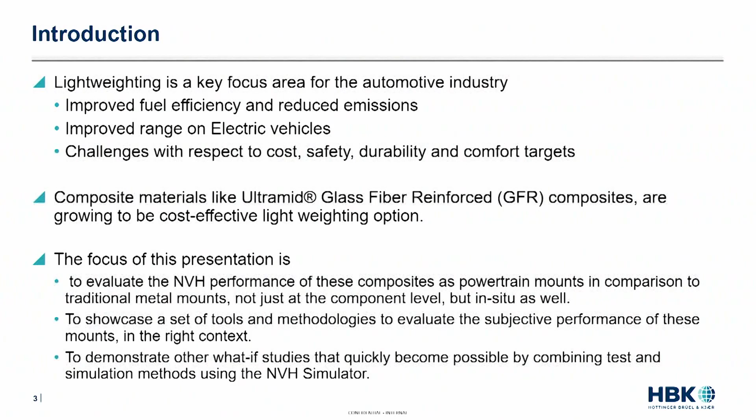Okay, so jumping into the technical approach here. For this study, what we did was based on a test-based approach, but I think a model like this opens up a lot of avenues for other kinds of data to come into play. But for this study, we focused on using a source path contribution or a transfer path analysis study.

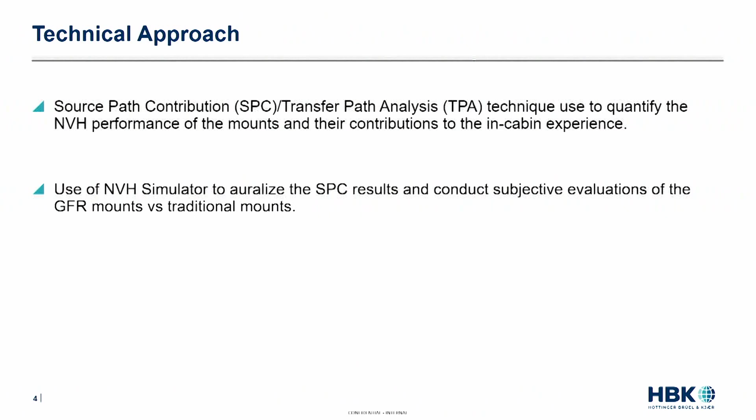So this is bread and butter, typical for NVH deep dive troubleshooting and target setting type of studies. So we use this to quantify the NVH performance of these mounts and understand their contributions in cabin. And then we took the results from this and put it into an NVH simulator for the subjective experience to be able to evaluate this back to back between the baseline mount and what the GFR mount sounds like, and then add the right context as well with that.

I think a couple of speakers who spoke before me did touch upon using a source path contribution approach or a TPA approach, so I'll try to be brief with it. The concept here is that you're trying to quantify or characterize all of the possible acoustic and vibration sources of your system or the system of interest. So if you're interested in powertrain noise and vibration, you want to characterize all of the possible acoustic and vibration sources and then sum all of them up together to say these are the different pieces that make up the total sound that you experience in the vehicle.

Now, in a test-based approach, you achieve this by putting a large number of transducers, both microphones and accelerometers, around your source of interest, and then you do operational studies, and you do static artificial excitation type studies, and then you combine the results. You feed all of this into an SPC model, and it will give you all of the pieces. It'll tell you what the partial contributions from each of these sources are as experienced at the receiver level.

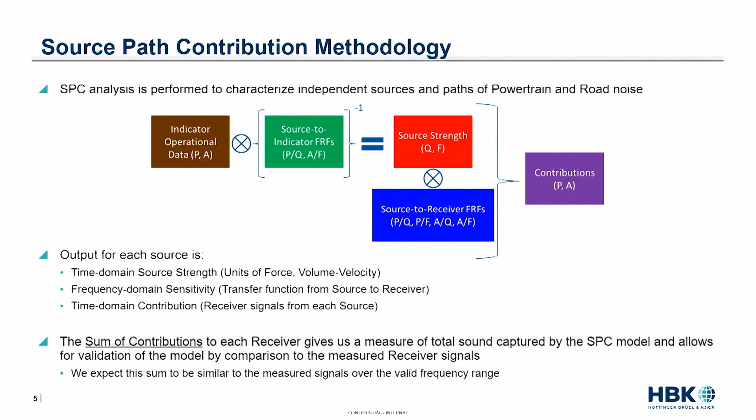So if you have quantified everything correctly, the sum of all of those contributions should add up and be the same as if you put a mic at the receiver ear and measured that. That's the goal, and that's the foundation of the model that we built here. So great. What comes out of this type of a model is, these are my top contributions. Is this an airborne or a structure-borne problem? Does this particular motor mount that I actually care about make it to the top of the list? You're starting to answer a lot of questions, which in the context of the vehicle are very important. You're no longer just isolated to just one component, but you're starting to understand how it matters in the greater scheme of things.

And so you take a model like that, and when you migrate it over into an NVH simulator model, you have now opened up many more doors and opportunities to do a lot of other things. You can take one subsystem and have a very detailed SPC model, but now I want context. I want to see how road noise and all the other sounds of a vehicle come together. Then this is a great way to do that. You can have different TPA models, and you can pull all of them together into the simulator.

Again, I feel like every bullet point I have on here was something that one of the other speakers gave as an example or an actual thing they've incorporated in their study or in their workflow today. So you start to combine all of these things, and then you have a model that is virtual, but it's drivable. It's pretty much comparable to hopping in a vehicle and driving, but now you have so many more possibilities at your disposal. So jury studies, target setting, target cascading, evaluating design changes, all of this becomes possible.

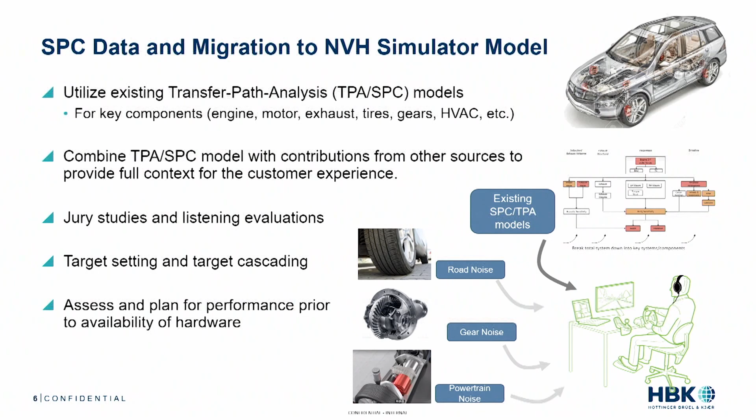So for this study, again, it was a test-based approach, so there are certain things we took into consideration for the SPC study. This was a powertrain-only study, and all of our transducers that were used to characterize our sources were placed on the subframe or body side. This is a pretty standard practice. This helps make the test approach a little bit easier. You don't have to deal with any kind of rubber isolation that you have if you were to place transducers on the active side. And so it's easy to then go do your static test with an impact hammer, which is a reasonably easy approach.

And then the other piece to it is for the SPC process, we use a matrix inversion approach, which is again a pretty common approach. And here there are certain rules of thumb to remember.

In order for the maths to work out, you need to have the right number of redundant transducers that will help identify or quantify your sources and the associated source strengths. So our typical rule of thumb is you want over, or at least 2 indicators per source.

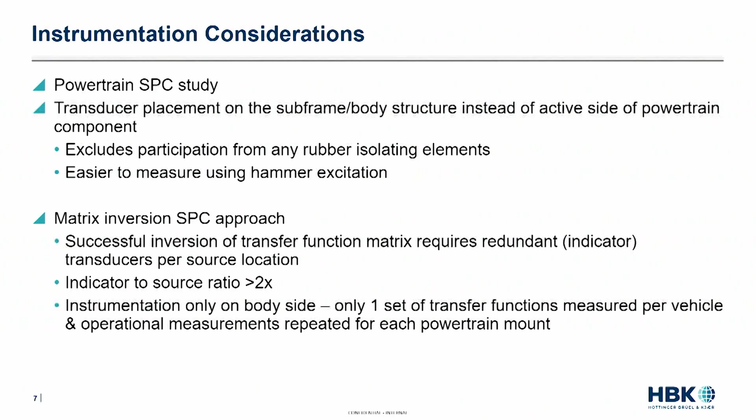And the advantage of this approach also is that because all of the instrumentation is on the subframe or body side, if I'm doing mount swaps, I only have to measure one set of transfer functions. I only have to repeat the operational study when I swap the mounts in a test approach. From a sensitivity measurement standpoint, again, we use artificial excitation, so in the form of impact hammer test for structure-borne and volume velocity sources for airborne. Again, mostly standard things that come with the SPC technique.

The thing I want to highlight is because this is an electrified powertrain approach, the thing to remember is frequency ranges. You're probably good if you just went up to 1600 hertz with an IC engine from a structure-borne standpoint, and then you go higher for airborne. But then with an EV, you need to expand both your structure-borne frequency range that you may care about, as well as the airborne. Airborne content now goes to much higher because you have inverters and higher motor RPM operational ranges to consider.

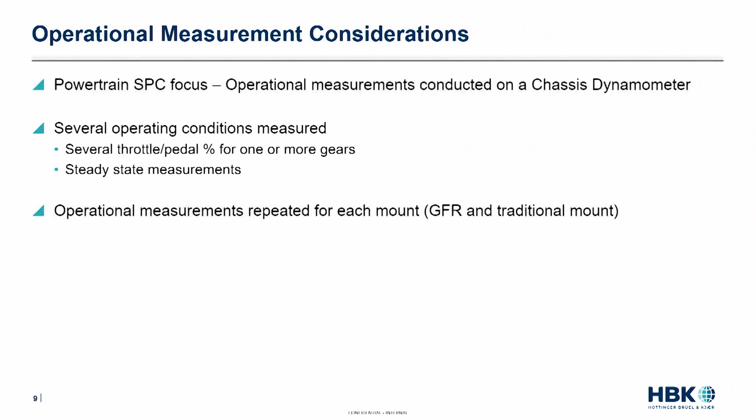And then operationally, in this case, we did everything on a chassis dyno. You can replace this with, I want to do a test bench approach to get my powertrain contributions. That's an option. You can substitute in different sources from where all of these pieces come in. But in our case, this was all on a chassis dyno. We did different operating conditions that will help build our model. And like I said, this was the piece that was repeated for both the mounts.

Okay, I'll talk a little bit about results. I think this is the thing I really want to highlight. We started with just the component level. We had an accelerometer on the mount itself, and we're looking at some results by doing a static test. And it looks like, right off the bat, looking at those 2 plots, the dotted black curve is a lot more elevated in response, and then you have a lot more peaks, whereas the traditional mount is pretty flat below 800 and above 1200 hertz.

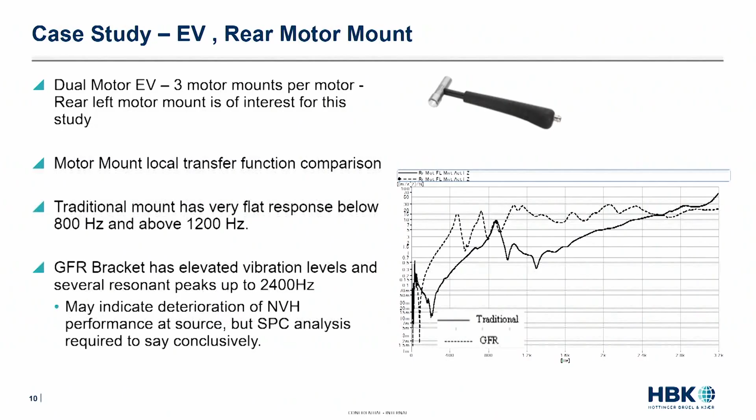So there's maybe some indication that this may not meet a natural frequency design criteria you may have, or there might be possibility for deterioration at the source. But then, is this really the full picture? We still don't know yet how much this component matters in the total soundscape of the vehicle. So we got to dig a little bit deeper. So the next step was to look more at the operational data, still at the receiver ear.

In a typical powertrain application, you'd look at significant firing orders if it was an ICE. In this case, we identified certain motor and gear mesh orders to be of importance, but then when we compared those, there wasn't really much variation. Maybe the gear mesh orders degraded a little bit, but not really a lot to comment on. So we looked at broader frequency bands.

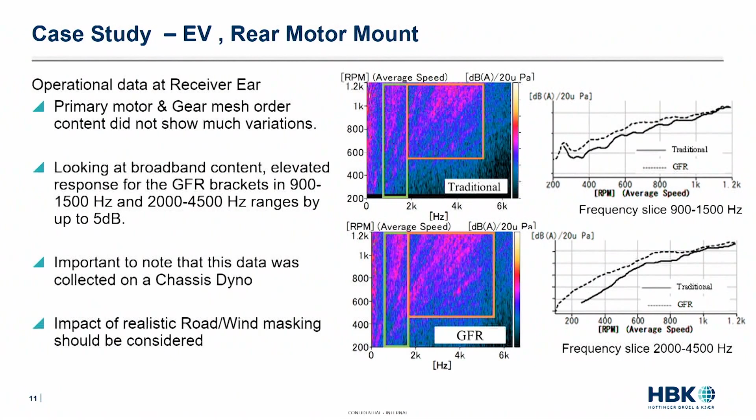And the added piece that the SPC analysis gave us is to establish, okay, is this a rear motor problem or not? And we found that this was rear motor dominant. We found that the airborne and structure-borne pieces associated with that mount that we cared about had an impact, or was a significant enough contribution that we would care about it. But again, we still haven't evaluated it in the right context.

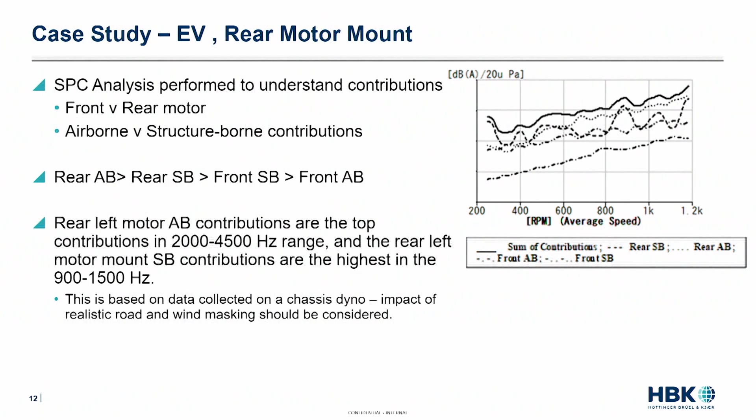And so what we did is we took this data and we took all the order content out of it, and we need to replace all of the dyno noise, which is the masking from the measured data, with more real data. So we took operational road and wind noise that we could simply plug in. It's just a one line item element in this model.

And this is pretty important, the fact that now you have an option where, from an NV standpoint, you've confirmed that there's no degradation in performance, but then you can now get a significant weight saving. That's a big win. And of course, you want to meet all other performance targets, but then the NV checkbox seems pretty good.

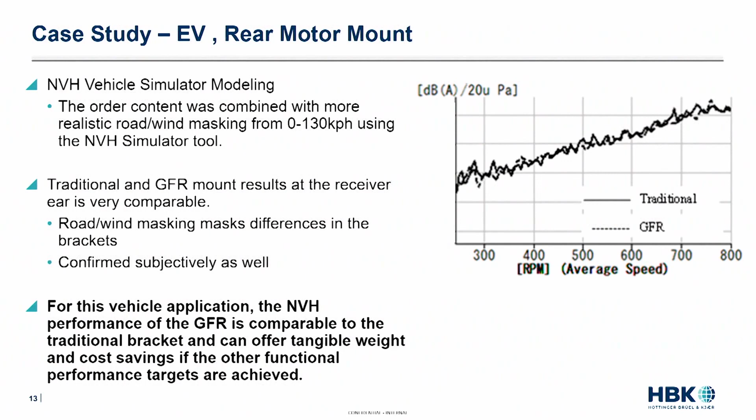I will skip over this one, but I will do another example here. So that was the main part of the study where we focused on a lot of those structure-borne contributions. But another important piece that I threw on here for this particular presentation is, we have this model now. What else can you do with it? And this is a great example. We got some data from ESI Group, where they did, for the airborne piece of it, think of it as an example study that they did, and we were able to adapt it pretty quickly and easily to this particular model that we built.

So they did a motor encapsulation simulation study, and they basically used their NVH software and gave us results in the form of a filter, which is basically a ratio of the sound power with encapsulation and without encapsulation. And we were very easily able to plug it into our model and quickly evaluate, oh, if I applied this to all of my airborne contributions, what would it sound like?

And if you were to do something like this in a test-based approach, it's going to be a lot more effort to really encapsulate the motor really well and be able to achieve similar or same results very easily or quickly. I want to play this video real quickly because that'll help.

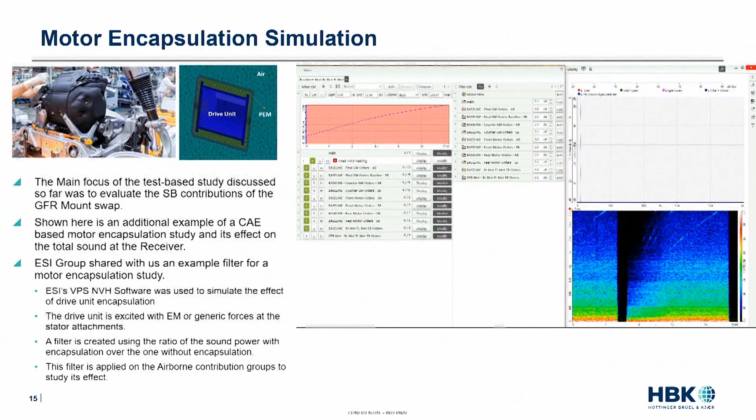And this is also a great example where, and Vinod mentioned it in his presentation, once suppliers and OEMs start talking in the language of simulators, then it's easy to connect all of the dots, get all of the context, and get everybody talking the same language. So I think there's a lot of value in the outcome that we got from this particular study.

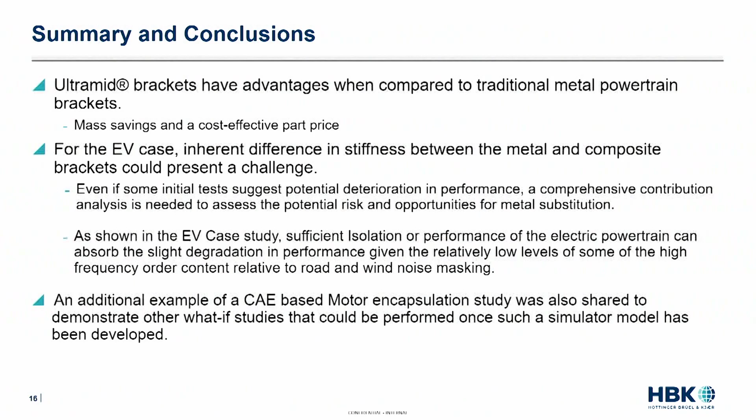So yeah, in conclusion, this was a great study to highlight the advantages of using these type of composite materials, which gives you a lot of mass and cost savings without really affecting NV performance. And for this particular EV case, we proved through a pretty deep dive study using SPC and NVH simulator models that yes, you have to assess the risks and opportunities here and these type of tools give you the right context to do everything. And finally, again, we were able to do other what-if studies once you have a model like this.